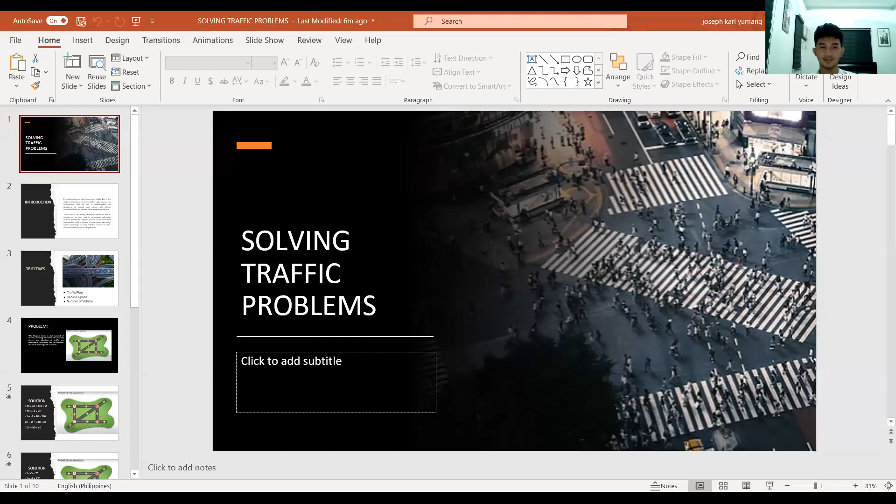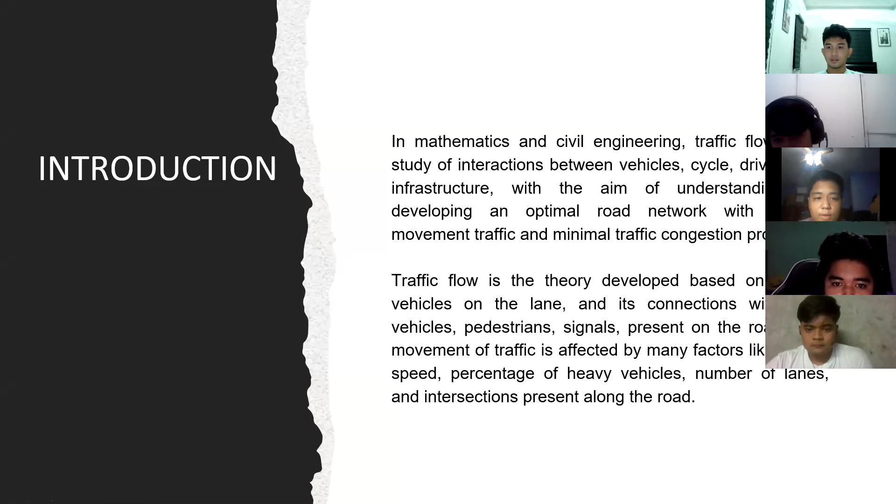In mathematics and civil engineering, traffic flow is the study of interaction between vehicles, cycles, drivers, and infrastructure, with the aim of understanding and developing an optimal road network with efficient movement of traffic and minimal traffic congestion problems. Traffic flow is the theory developed based on flow of vehicles on the lane and its connection with other vehicles, pedestrians, and signals present on the road.

Free movement of traffic is affected by many factors like design speed, percentage of heavy vehicles, number of lanes, and intersections present along the road. Traffic flow in a road is expressed as the number of vehicles using the particular road per unit duration of 1 hour. It is measured using traffic counts made for a particular duration at one point on the lane stretch.

There will be a variability in the count made during the different hours of the day. For any analysis to be made based on traffic flow, peak hour traffic is considered. Traffic flow measurement is required on the road to locate the point on the road where congestion happens, assessing the requirements of traffic signals at an intersection, estimating the capacity of the roadway to meet with the present

flow. Traffic flow is dependent upon two parameters, speed of traffic and density of vehicles on the road. For the flow to be without congestion, density of vehicles should not be more than 30 vehicles per mile length. Free flow speed on a freeway should be 75 for improved level of service on a particular road. On an urban road, free flow speed should be maintained around 50 miles per hour.

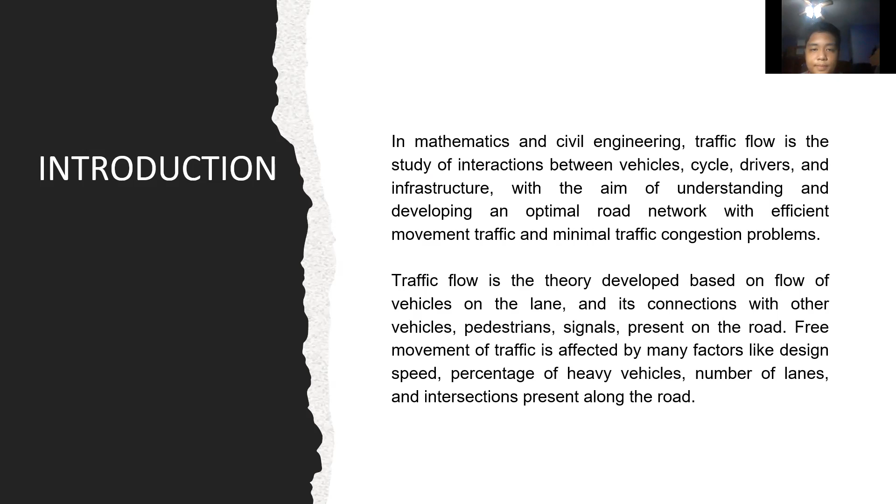Traffic flow is measured using sensors, loop detectors, video measurement, and manual count of vehicles subject to the magnitude of traffic counts. Measured traffic is converted as annual average daily traffic, or AADT, and design hourly volume for the purpose of pavement design, provision of lanes, etc. For the objectives, the aim of the project is to analyze the traffic flow of each street by applying a linear equation system in which we will identify the vehicle speed and the number of vehicles on each road.

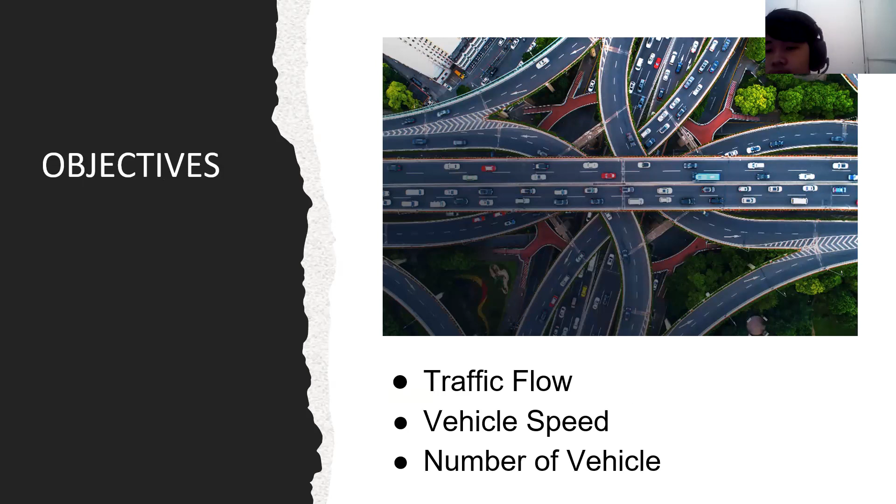So for the problem, here's a diagram that shows a small network of streets, assuming all streets are one-way streets and the direction of traffic is indicated by the arrows. For reference, it is useful to name intersections in the network, so we'll name them A, B, C, and D. So we need to find the flow rate of cars on each segment of streets.

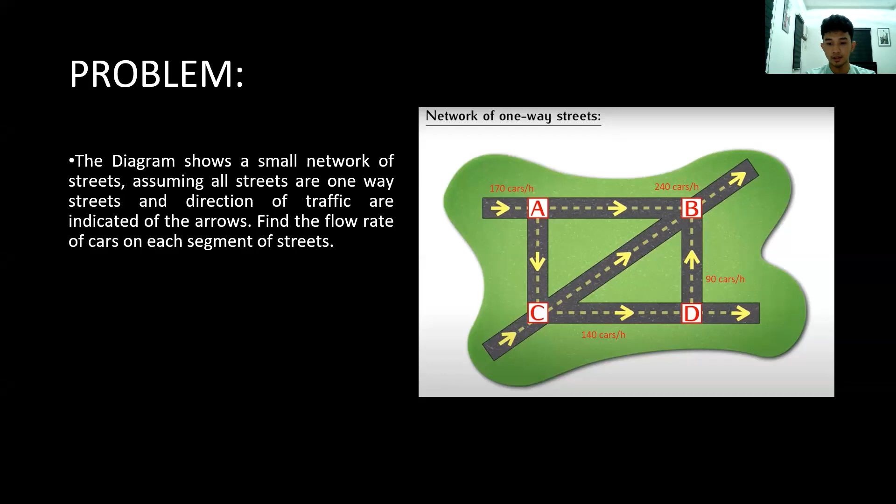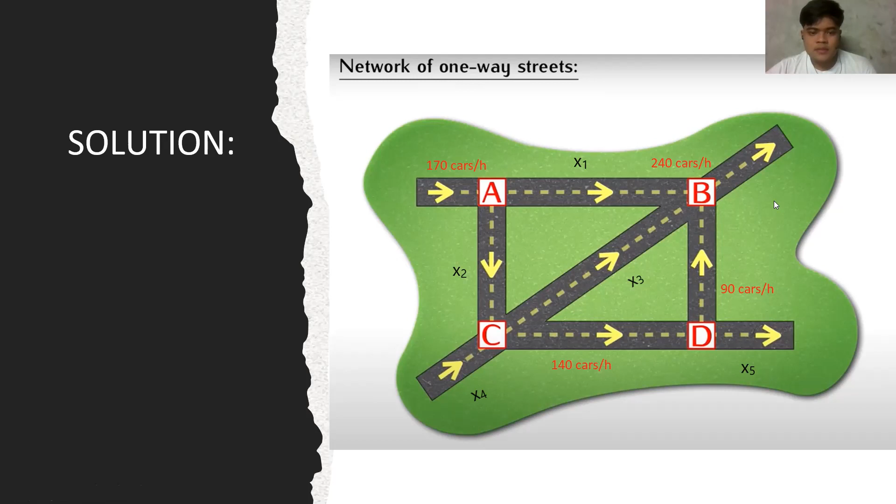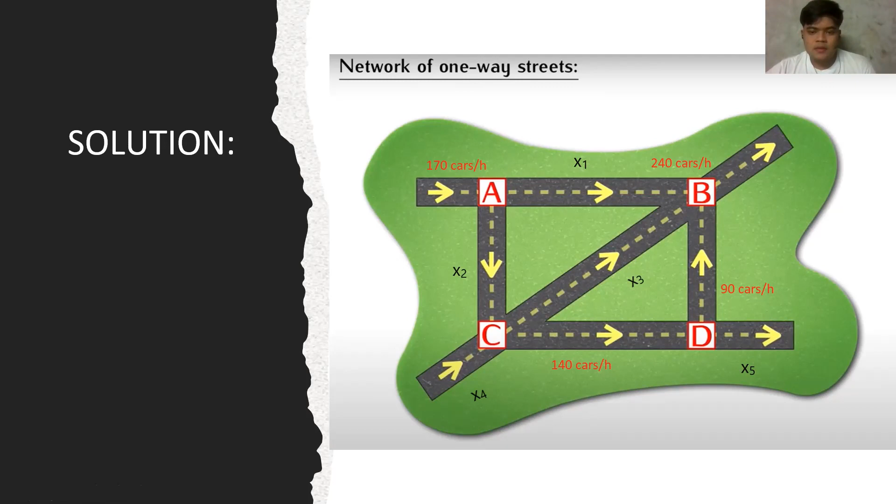The solution for this problem is first we have to determine the given values in this problem. So first we indicate x1, x2, x3, x4, and x5 in the given diagram. And then we first get the value of the incoming vehicles to the intersections A, B, C, and D to the outgoing vehicles. And thus we have an equation of 170 cars per hour plus x4 is equal to 240 cars per hour

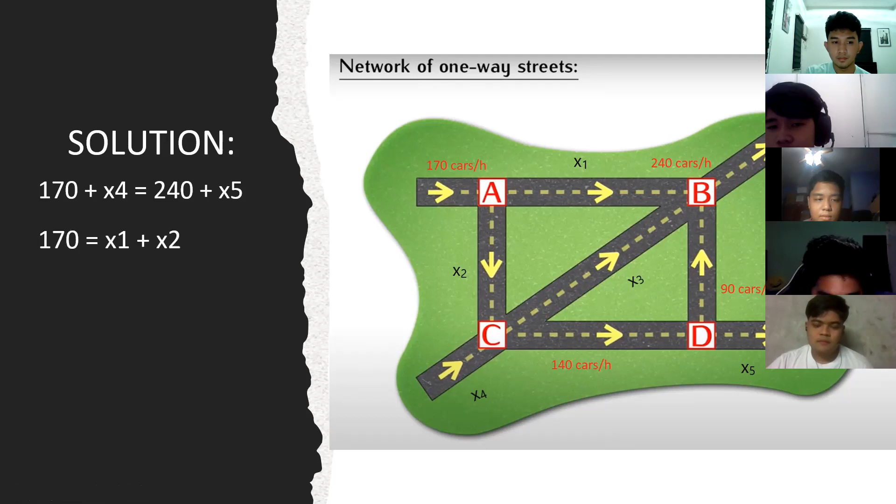plus x5. Next, we determine the value of the interior intersections, from intersection A, which connects three streets. That is 170 cars per hour is equal to x1 plus x2. Another is intersection B, which has four streets, x1, x3, 90 cars per hour, and 240 cars per hour. That gives us an equation of x1 plus x3 plus 90 is equal to 240.

The other is intersection C that also has four streets, that is x2 plus x4 is equal to 140 cars per hour plus x3. And lastly, intersection D has three streets, with 140 cars per hour is equal to 90 cars per hour plus x5.

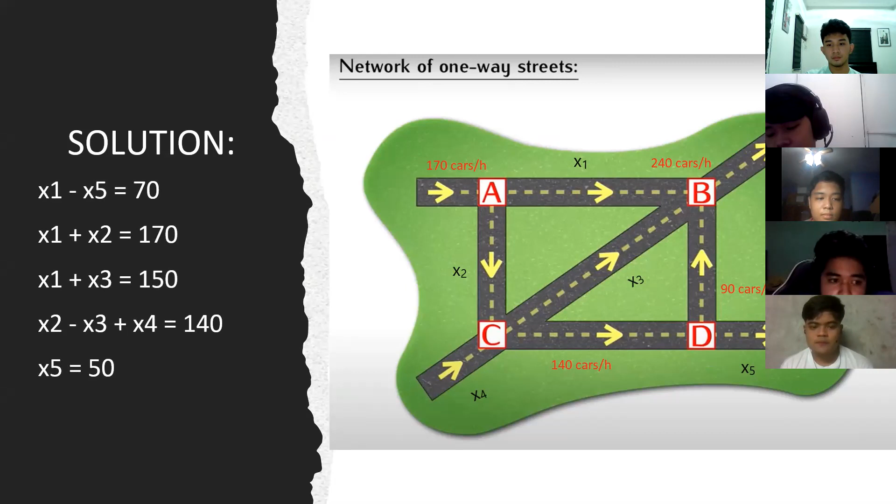If we let x3 equal to s, we have x1 is equal to 150 minus s, x2 is equal to 20 plus s, x3 is equal to s, x4 is equal to 120, and x5 is equal to 50.

In this problem, we are finding the flow rate of cars on each segment of the street from the calculation we performed in MATLAB. We conclude that if we let x3 be a whole number s, then x1 is equivalent to 150 minus s, x2 is equivalent to 20 plus s, x3 is equivalent to s, x4 is equivalent to 120, and x5 is equivalent to 50.